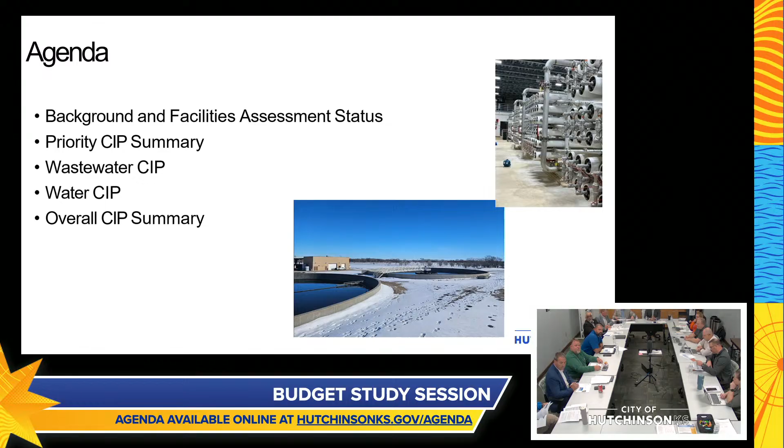Okay, that actually sums up what I was going to do. I'm Dave Gwynn, Director of Utilities for the City of Hutch. Evan Patterson is going to go over everything for us, and we have Alex Beck back here with HDR. Agenda for tonight: we'll go over the background, facility assessment status, and priority CIP summary. Then we'll go over wastewater CIP, water CIP, and the overall CIP summary. So I'll turn that over to Evan.

Okay, Evan Patterson, city engineer. HDR has been working to assess our water and wastewater systems. They primarily focused on site investigations of the wastewater plant and the water treatment plant, and they will be coming back for the wastewater treatment plant to investigate the digesters. Their investigations, coupled with our staff's participation in discussions, allowed us to prioritize the projects identified from those site investigations. We have a rating system that we developed, and the projects classified as poor or emergency are the ones we'll propose to include in what we call the Year 1 CIP, which is the 2026 budget.

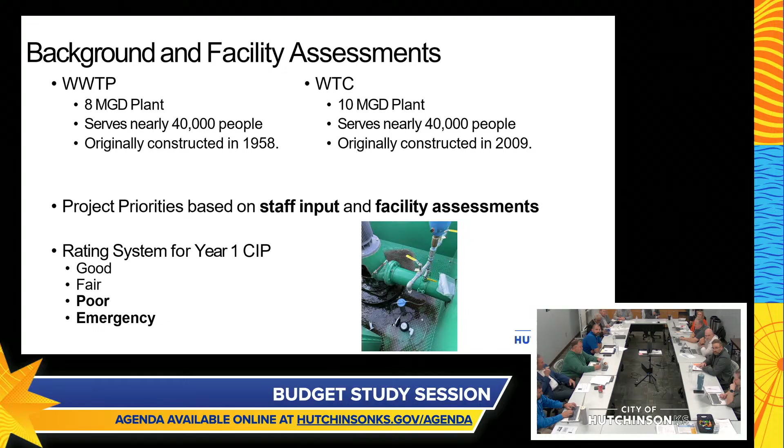Working with HDR and our staff, we evaluated the projects considering whether we would rehabilitate or replace parts of the plants. Our keys were to maximize the life of the assets in each area and to consider the smartest investment for the city in each case. We developed costs using vendor quotes when applicable, and bid tabs when we had that reference information. All the costs in this presentation are all-in costs—they include engineering, construction, procurement, and contingency. In some cases with multi-year projects, not all these costs would be burdened in the first year. We'll get into that with some of the more long lead time equipment.

Evan, if I could chime in real quick—part of the direction from staff and ultimately the consultant, especially looking at the wastewater facility during the budget tour, we saw the condition it was in. Even with that in mind, the direction was: is there still a way to salvage the facility instead of defaulting to building new? That was the guiding focus, in hopes that maybe there can be some innovation there. I wanted to remind the public at large, or whoever may be listening, that the default was to ask if there's a way to salvage what we have, not to just build new right away.

Correct. And in all these cases, what we're evaluating right now is just the ones classified as poor or emergency, primarily focused on health and life safety issues or risks to operation. These are the immediate fixes we need to do, minus a few we've actually started implementing already. We have an area of the plant where the walkways are unsafe—they were identified during the investigation. We've already roped those off and are working on getting them repaired right now.

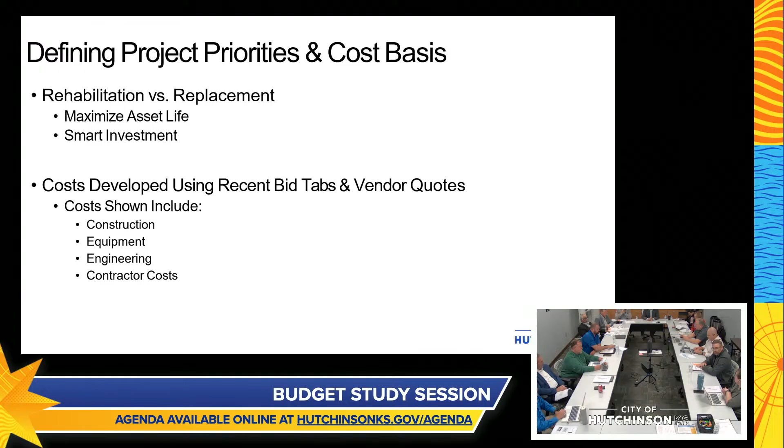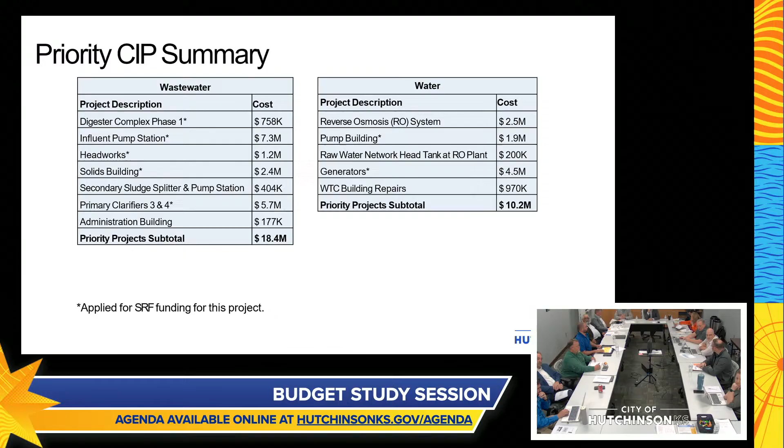So this is two lists of what we're calling the priority projects. We have a handful of other CIP projects that we'll go into detail on in this presentation. These are the ones we're going to touch on rather quickly because we don't have a ton of time. There's a list for wastewater and a list for water. We applied, or pre-applied, for SRF funding for a number of these, and we hope to have an answer on which projects will qualify midsummer. The date they promise is July 1st, though I don't know how we'll meet it.

So we'll first go through the wastewater treatment plant. You all did a tour of the plant maybe a couple months ago, so you're relatively familiar with the condition. Some of these photos show other items HDR identified during their visit. We have concrete that's failing, equipment at the end of its useful life, and areas that are not up to code anymore.

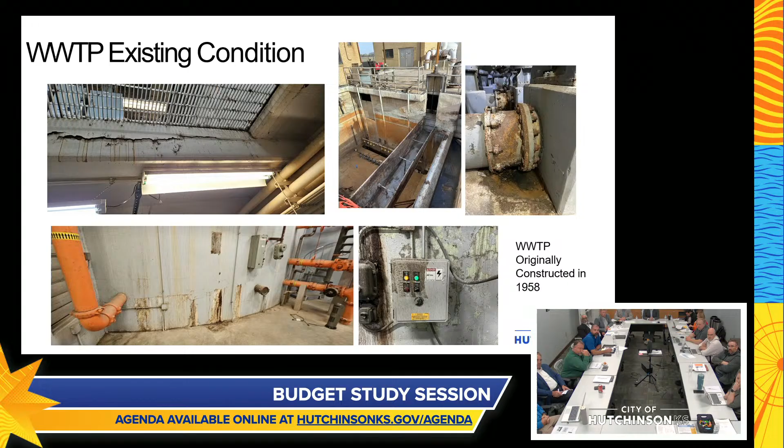One of the key areas is the digester complex. We're labeling this digester complex phase 1 because it's the set of critical items that make this area safe for our workers to operate in. We have life and health risks right now at the plant, and we feel it's important to spend this money as soon as next year to make it safe for our workers.

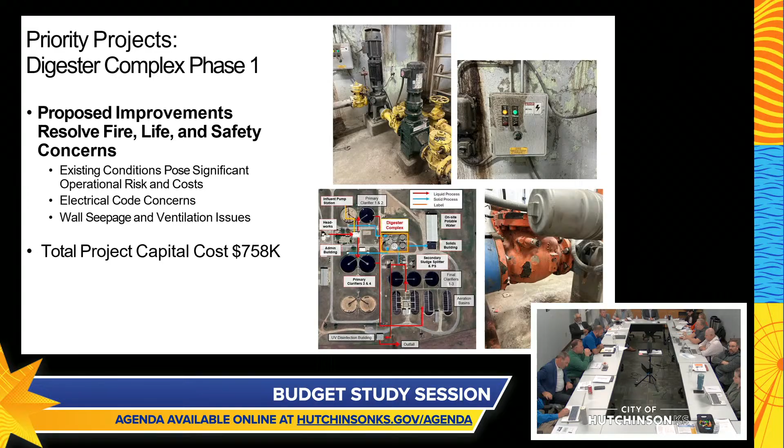As I mentioned earlier, HDR is going to be back soon to do an investigation inside the digester complex. It was identified by Burns and McDonnell as one of the critical areas even in their 2018 assessment, which is why we have some money in, I think, the '28 CIP to do work out there. It's probable HDR will identify some items inside as well, but this is the list. This $800K is for the life and health safety issues.

One of the other critical items is the influent pump station. This is the heart of the plant — where all the liquid feed comes in and sends flows throughout the rest of the plant. This system has slowly been decaying over the years. We had a number of pumps initially, and as those have gone out of operation, we've scavenged them or shut them down. We need to replace the pumps and redo all the piping and valving in the pit.

This project actually has two sets of pumps. The ones critical to operation are on the south side, and those are the ones we've identified as doing first. Phase 2 allows us to send flow to the clarifiers on the north side, letting us handle a lot of the varying flows from our bigger customers that cause problems with plant operation. That's an important capital expenditure, but not as important as the south side ones. So while we have a total of $7 million and change in the CIP, within this project the south side ones are really critical.

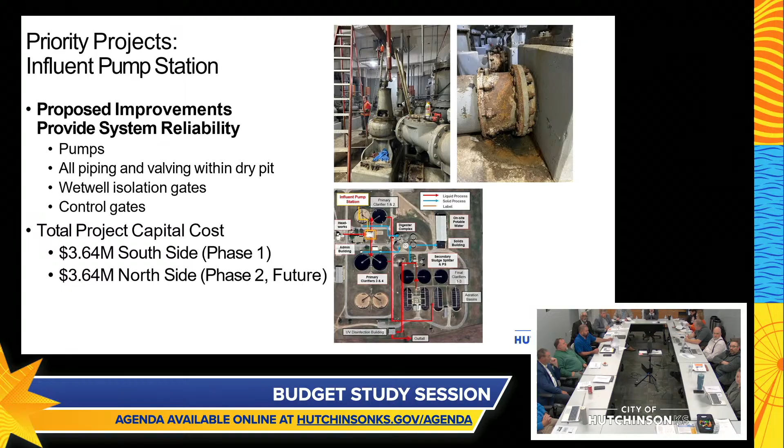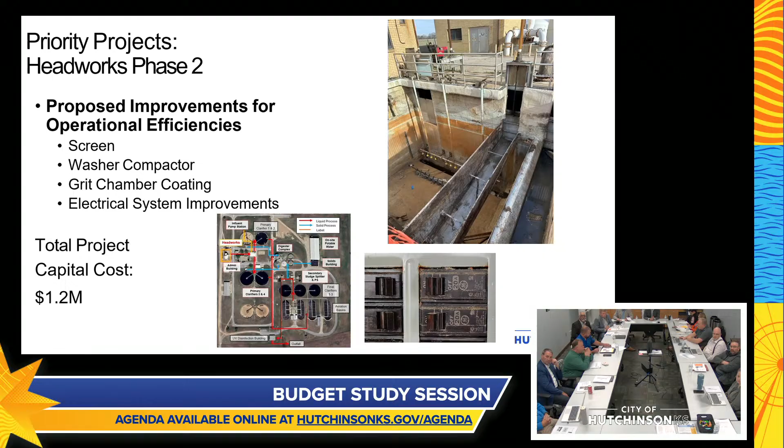This is Headworks Phase 2. We currently have Headworks Phase 1 under construction at the wastewater treatment plant, getting the grit screen up and running. This project will get the screen and other components, including electrical, up to code. This system isn't operating right now, and every day it's down impairs the operation of the rest of the plant — rags and other tissues get clogged in the piping and valves and can cause operational issues. Getting this up and running is key to maintaining operation in the rest of the plant.

So that's a huge portion of that $2.4 million, just for the replacement of a single piece of equipment. It's just that every day the Headworks isn't operating properly, it damages it more.

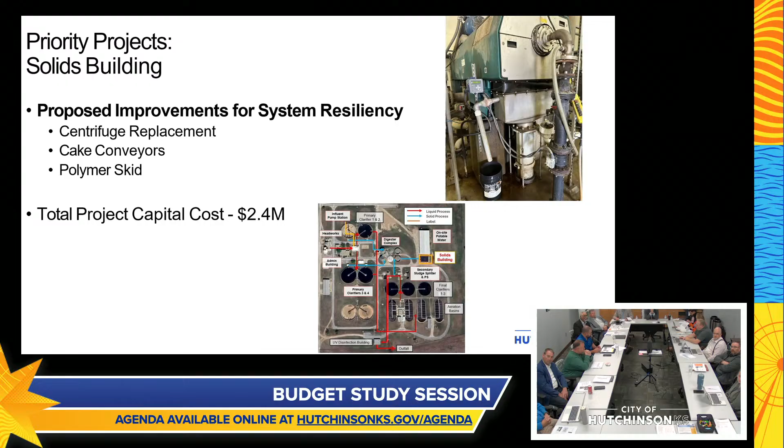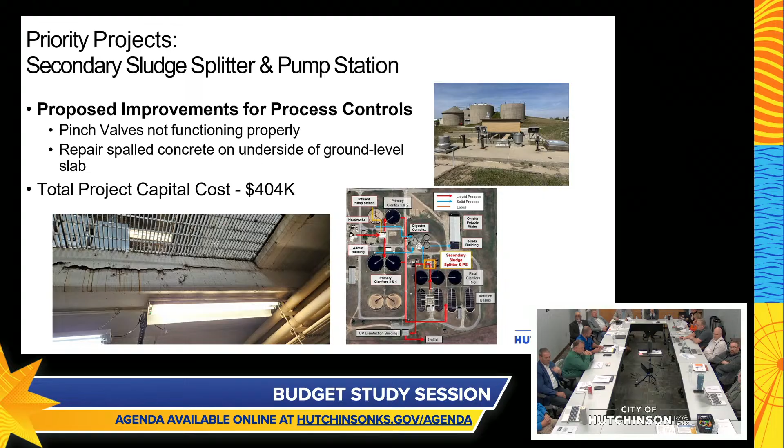The secondary sludge splitter and pump station is another key process portion. We have some pinch valves that control flow between the various parts of the plant, and they're not functioning properly, need to be replaced. You can see the concrete is beginning to fail on the slab for this splitter box and needs to be replaced. It's not as expensive, but it's a key part of this overall upgrade.

The primary clarifiers, we initially thought were in pretty good shape until we drained them for HDR's inspection. HDR then found, as you can see particularly in that bottom photo, where the concrete's starting to spall away, and you can see the rebar exposed there. Basically, all of the innards of the clarifiers need to be replaced - the rakes, the mechanisms, the platforms. The concrete's in okay shape, so the outside tank is okay, but we need to replace everything inside.

This $5.7 million looks like a lot of money. It is a whole lot cheaper than putting in two new clarifiers. So we're able to save a lot on reusing the concrete, but the clarifiers themselves are not in good shape. Unfortunately, while it's a big cost, it's also another element critical in the separation between the liquid and solids in the plant.

I have a question on that. What part, or how much of the concrete is being reused or being completely rebuilt? Probably, I would say the bulk of the concrete.

What we see right here is really where we're supporting walkways, where it's been supported above the liquid. The concrete for the tank itself, you can get a lot of extra years out of it by using an epoxy liner. So we'll maybe use an epoxy liner in the launders and in the bed itself. Sometimes that's where you get a lot of wear as the solids slide down the bottom of that cone. But epoxy has been used consistently in plants like this to get you another 10 or 15 years fairly easily.

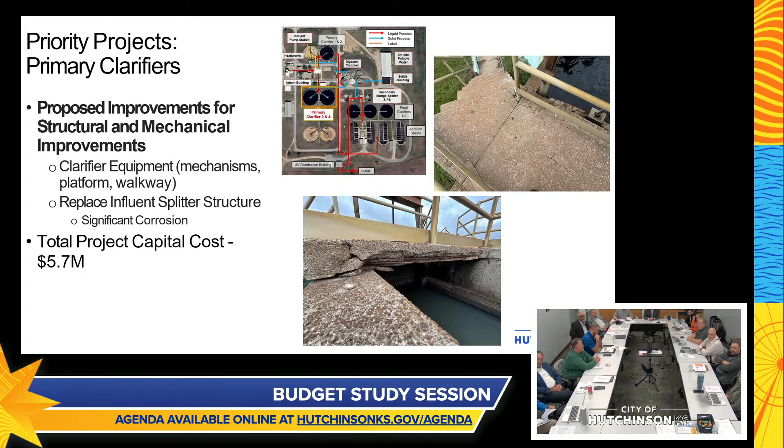The administration building - it's at the end of these projects, so you may think it's a low priority, but really it's just here because this is phase one. Again, like a lot of these other ones, we need to get the admin building to a point where it's usable for the occupants. We have issues with the roof, and then there are areas of the building where the workers don't go because of issues with mold.

We talked about getting potable water out to the site, and while that's a priority, we kind of had to step back and rethink how we were going to get it out there, so we'll talk about that at some point - just not ready to present any plans on it. So we'll have to get by as we can right now. But in order for the workers to actually be able to use the administration building, we need to address these two issues.

The administration building also has the controls in it, where it monitors the plant, am I right? Is that still there? I think that's still all in the lab, and the control room are all in the admin building. Does that need to be redone, or is that all fine? No, I mean, it's something that with the existing plant at this point, you don't need to touch. If you were to go and make a larger upgrade at the facility, then you'd need to revisit that item. So the controls will still work the plant when you get it all fixed, right?

With these improvements, there may be some electrical improvements required down the line, but at this point you wouldn't need to enhance that equipment at the admin building.

So employees, do you have enough adequate employees to maintain the system? Yeah, we're fully staffed right now, and we're working in part with HDR to get additional training for our staff on preventive maintenance. We're also implementing an asset management system to help maintain some of those systems better, so we're trying to do the right things to prevent this from happening again. That's our goal. June 18th and 19th we'll have staff in town to train operators and newer staff out of the plant later this month.

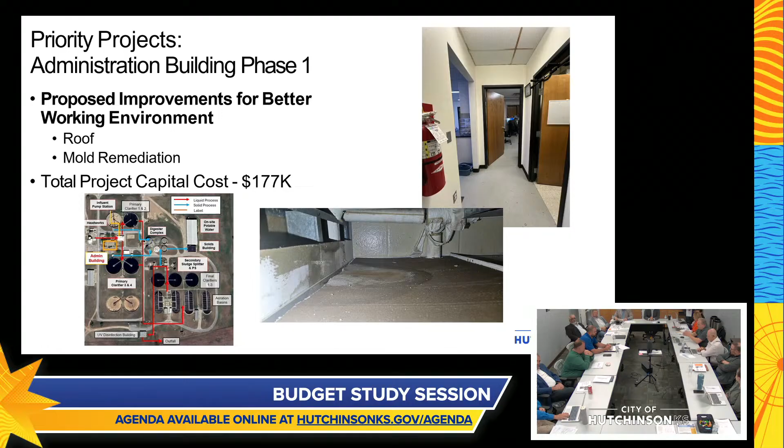So that's it for high priority projects at the wastewater treatment plant. The water treatment center is a much newer plant, dating from the late 2000s, around 2008-2009, when it got up and running. It's in much better condition, in part because it's younger and also because we've worked hard to maintain it. That being said, some of the things we're going to talk about now are also to avoid ending up in the same situation we're in at the wastewater treatment plant.

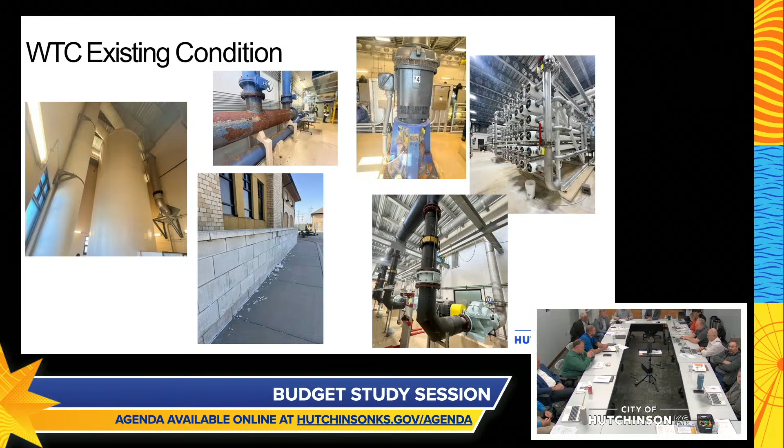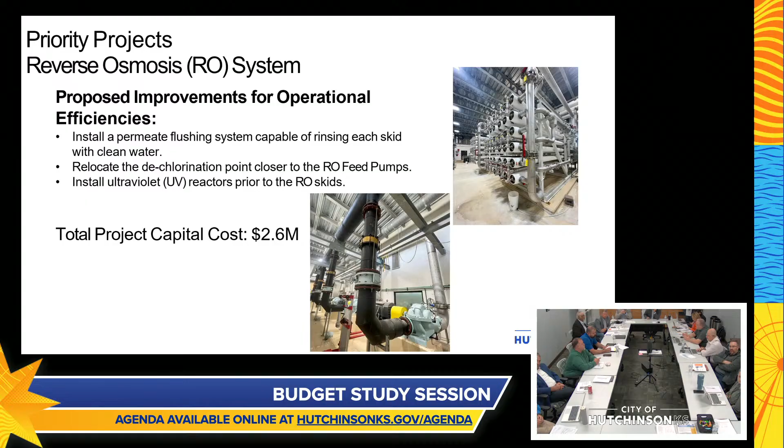We want to do investments that keep the infrastructure in good shape. We have some operational issues with our RO system - we're getting biofilm development, so we've got a couple of things we want to do to remove it. We're going to improve the permeate flushing system so it's easier for operators to flush the RO membranes, relocate the dechlorination closer to the RO feed pumps, and install UV reactors to help kill the bio part of the biofilm before it gets into the RO membranes. That should extend the life of our RO membranes and make the plant operate better. This is a fairly high cost, but hopefully has big benefits for us.

This one is also fairly expensive. I think all of you, when we did the tour and went down into the pump building basement, saw the condition of the pipe down there. So we have a lot of work to do - either surface prepping and recoating existing pipe, or completely replacing some of the stuff that's just corroded too much. One important thing to note is that we've recently replaced the HVAC equipment in the pump building to hopefully avoid this kind of corrosion. We were running chilled water coils in there and had real issues with humidity control - the humidity was insane, with condensation developing all over the surfaces. Now we have DX units in there to help keep the humidity low, and once we've done this resurfacing and pipe replacement, we shouldn't have this kind of problem again.

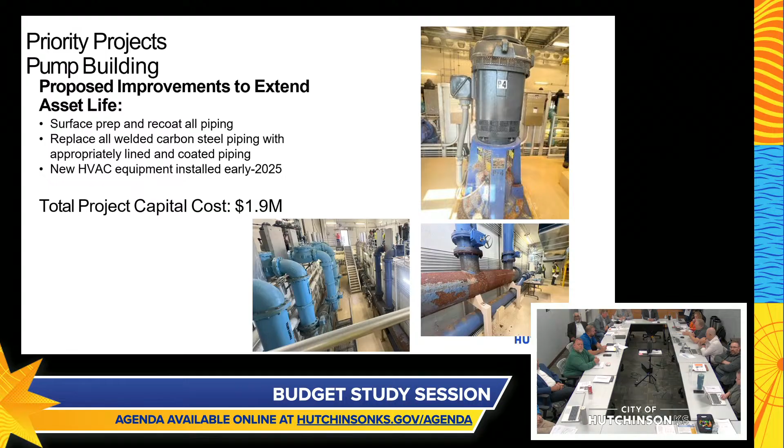One of the other issues we have is that right now we have VFDs on all the Northwest well field pumps, and they're all fighting with each other. They're having difficulty finding good operating points because of the way that they tie into the RO plant itself. So we've proposed putting in a head tank at the RO plant that gives them a consistent pressure they're all reporting to, which means the VFDs can then find that right point to run at. This is going to extend the life of the pumps and the VFDs because they're not hunting and bouncing around so much, and give us better operational efficiency.

I don't have a picture on this one, I'm sorry, but we've sketched some stuff up. It's just a head tank, like 20 to 30,000 gallons, something like that. Enough to handle the fluctuations in flow as we bounce around between the control points.

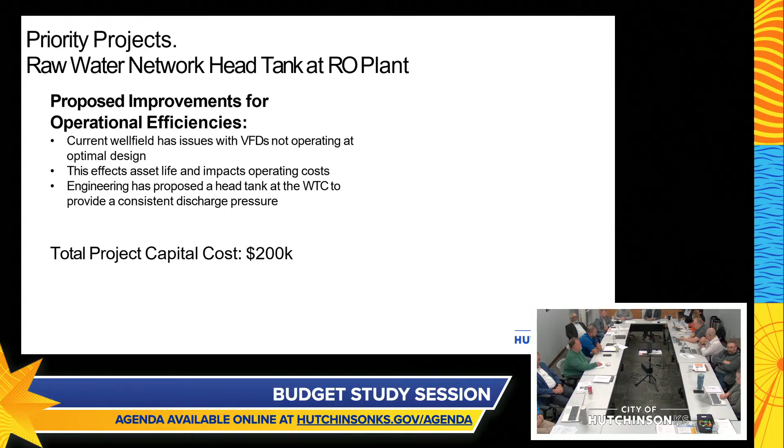So 8 hours before other measures are taken? Yes, correct. Yep. This is an electrician's question.

Now, why don't we do like wastewater treatment, we'll have 2 different feeds coming in. One feed goes out, we go to the other feed. We do have 2 feeds. They're both 2,500 kVA, but they both feed different parts of the plant. So we'd have to upsize the feeds coming into 5,000 kVA, and then we could do that. But I don't know how far back we're losing power without talking to Evergy about it. I'm not sure if it's something where it's the failure on their end at some common point back. Gotcha. So it doesn't, your 2 feeds doesn't feed the whole plant? I mean, no. I didn't know that. Yeah, I didn't either. Because I figured it was redundant, but I forget what they feed, but one of them feeds like the RO building, and then the other one I think feeds the pump building, something like that. So, sorry, went on a tangent.

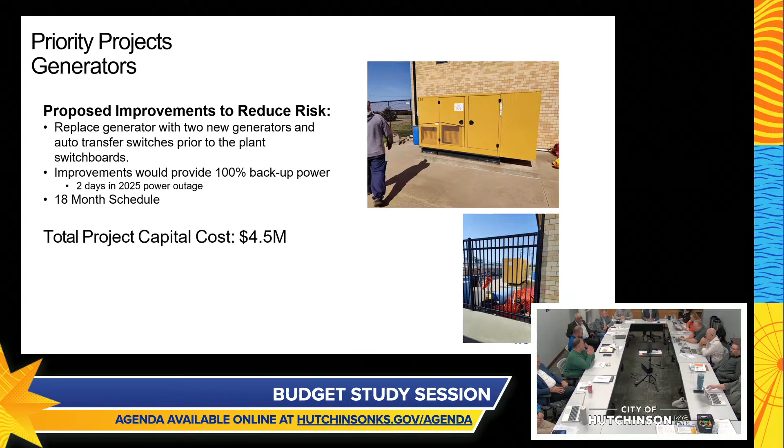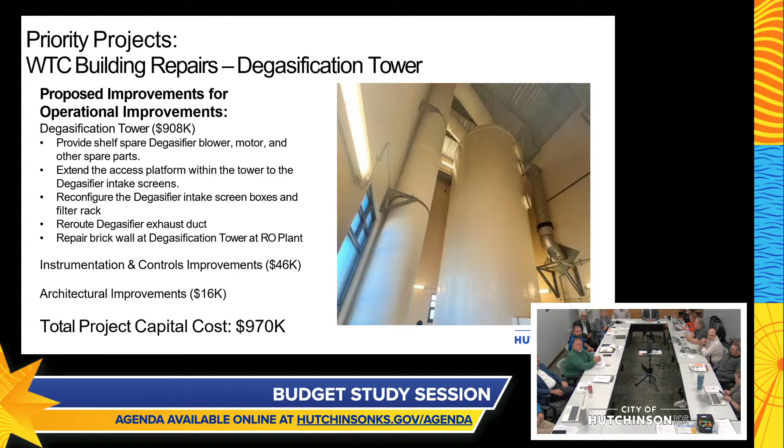Now, we pre-applied for SRF loans for those projects, but just because we pre-applied doesn't mean we're beholden to actually following through on those loan applications. I think it's worth discussing within yourselves as a city council where we think the appropriate use of our funds is. Some of those projects may be meritorious, but it's a lot of money that then wouldn't be able to be used for some of these that HDR and the City of Hutchinson teams have identified jointly as real priorities for our existing infrastructure.

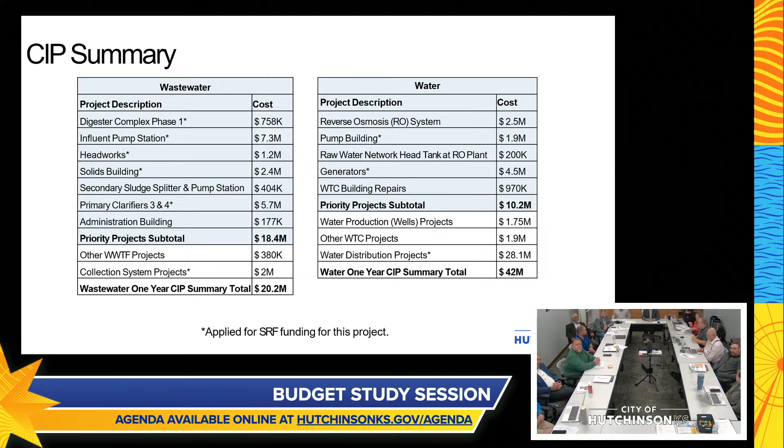And that's it. Questions? I went through a lot really fast. You guys have some other supporting documents in the back there that talk through some of this stuff in a little more detail.

We don't go through some of this stuff because we know we're kind of busy tonight and we don't want to get bogged down with everything, but it's in there so you have that information. If you have any questions for us, please don't hesitate. You want to come back to the plants, take a look at stuff - Alex is always willing to have a conversation, so whatever you guys need, we're more than willing to help.

The only concern that I have is do you plan on putting a full-time electrician, because there's a lot of electrical in this. It's mostly 85% electrical. Am I right? Dave and I have talked about that.

Okay, yeah, because I used to work on all that stuff - I know it's a lot. It is a lot, yeah, it's crazy. I mean, mechanicals like to think it's all driven by the process equipment, but the electrical and instrumentation is really what keeps everything moving. It's still a work in progress. Yeah, but that's not including your wells up there.

Right, wells, all of the lift stations, all of that infrastructure.

So I feel like you guys should have started with a statement that says the water is all good and you can drink it and you can flush your toilet. It's just that we have really old equipment and it's working double and triple overtime and we have to do all these extra steps, and that's why we are where we are. Because if you just hear what you guys just said and that's it, that's concerning, but we are not at a point where the water is at risk or any of these things. So you guys had me scared for just a minute, but I know the backstory. I just want that out there for people watching or just tuning in - there is no concern, it's just that we have really old equipment, it's working way too hard, it's not efficient, nor is it within its maintainable life any longer.

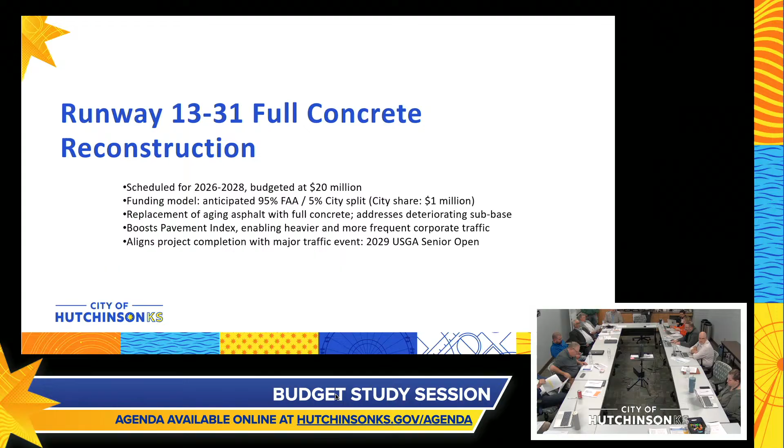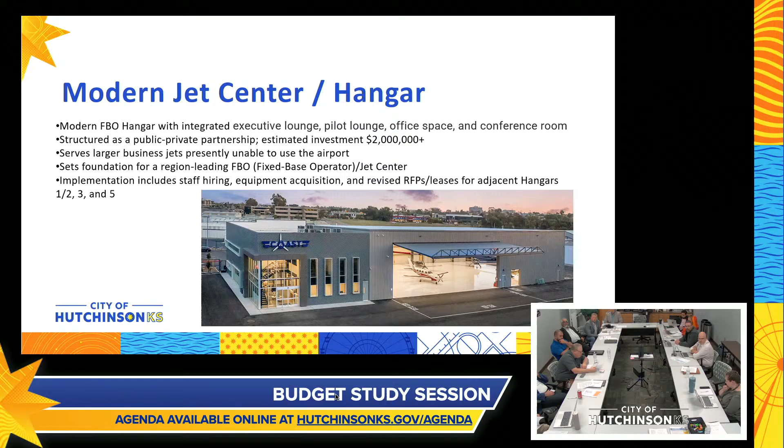Next part of this is FBO operations and exercising the city's proprietary exclusive right as the sponsor of the airport. This would effectively be the airport administration taking over the fueling operations.

At the conclusion of the Wells Aircraft Services lease at the end of 2027, we would have to beef up our staffing model. This is an estimate of what that would look like: 4 operations technicians, an ops manager, admin assistant, and airport director. This is the closest labor cost I could get at this time, as well as the ground service equipment layout, and in your packets it breaks down all those numbers for you.

In this scenario, this transition enables Wells Aircraft to remain at the airport if they so choose, and continue to provide their Cirrus Service Center services.

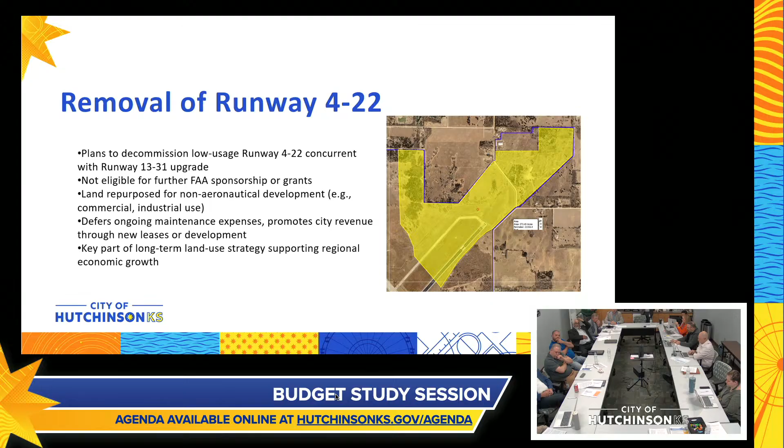So for the 2026 CIP, originally I had airport signage replacement at $25,000. We might push that off to a later date.

On the Airport North maintenance shed - this is to bring electrical power to a shed that was built prior to me joining the city. The shed is already set up, it's already got electrical doors, it's already got lighting, it just doesn't have power to it. If we give power to that, we could actually satisfy one of the requirements for getting a dedicated plow truck grant.

Next up, I've got the rehab for 13-31, the reconstruction. We would be looking at the planning and engineering analysis next year. That totals at $160,000. We would utilize BIL, and then our local match would be only $8,000.

Alec, what's the grant on this, on the Airport North utilities? You said this would make us eligible for a grant. Yeah, so that would be for a dedicated plow truck. Well, what's the amount of the grant? I'm not there yet, to be honest. So we have to get power to the building first - they require us to house that piece of equipment.

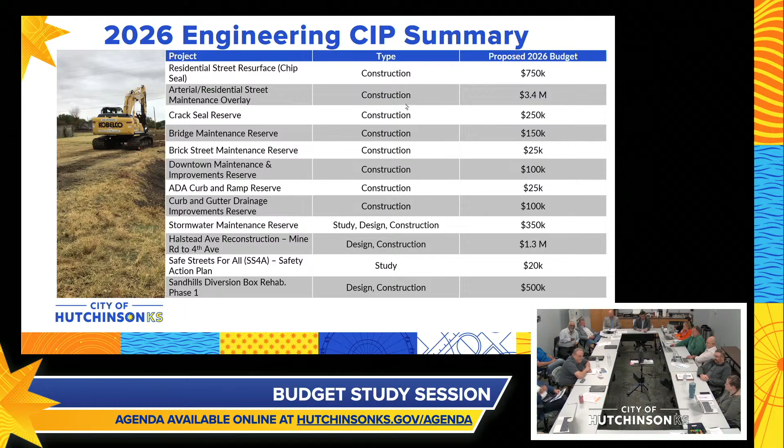So that's kind of the overview of these, and we have some slides that go over each. Our residential chip seal areas are planned to help keep the streets drivable. Chip seal is a very good product for keeping the streets up to date, but eventually more work has to be done. So we have an 8-year cycle right now where we touch every residential street in the city once every 8 years.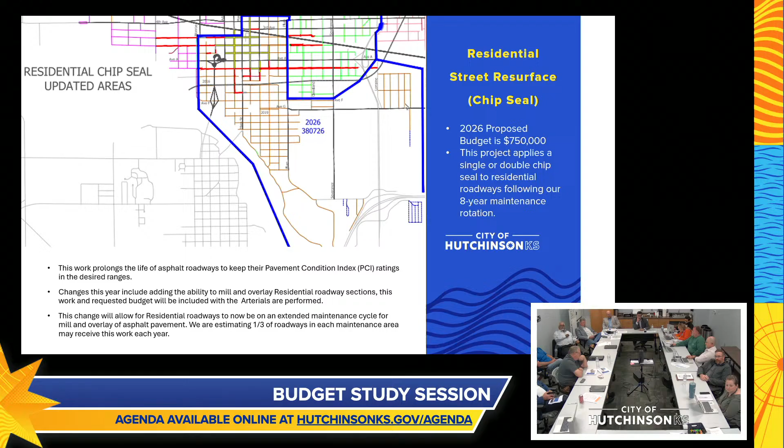Along with that 8-year cycle, starting in '26 we're also going to implement a mill and overlay on a third of each of those areas. The idea is you can only chip seal so many times before your streets get too thick - you have to do something different. So we'll do a mill and overlay on a third of those 8 sections of town, meaning once every 24 years, every residential street in town will have a mill and overlay, which is roughly the expected lifespan of asphalt roads.

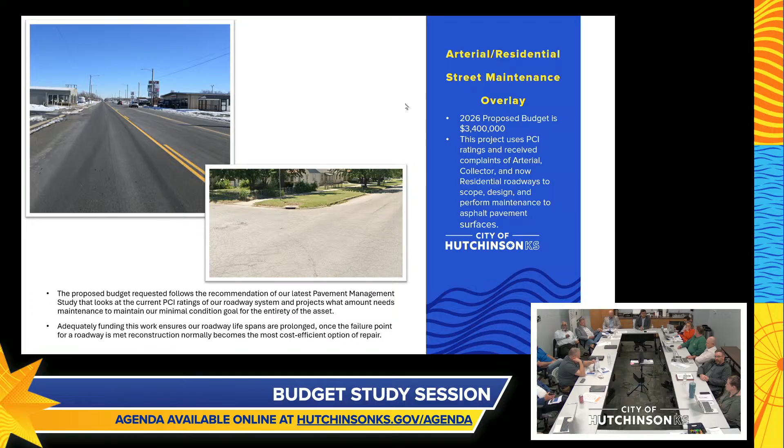We're doing chip seal as site maintenance. Crack sealing is just an ongoing process to keep the roads up to date - it expands the life of those roads by keeping moisture out of the areas.

I think so, yeah. So I have a question on the crack seal and then a question on the sand hills box. Stupid question about the sand hills box - when they fix the concrete, are they just doing it from the inside?

Depends on where the failures are. I think the failures are largely on the inside - from the last report we had done about 10 years ago, I believe the failures were all on the inside, but I'd have to go back and look.

And then on the crack seal, once they crack seal, we're not going behind them and repainting center stripes and sidelines in every location. What we're trying to do with newer projects is work with new street construction to have that center line offset slightly, so when you're putting your thermal lines down, they don't line up directly on the seam. Because when you crack seal that seam, you end up covering it up.

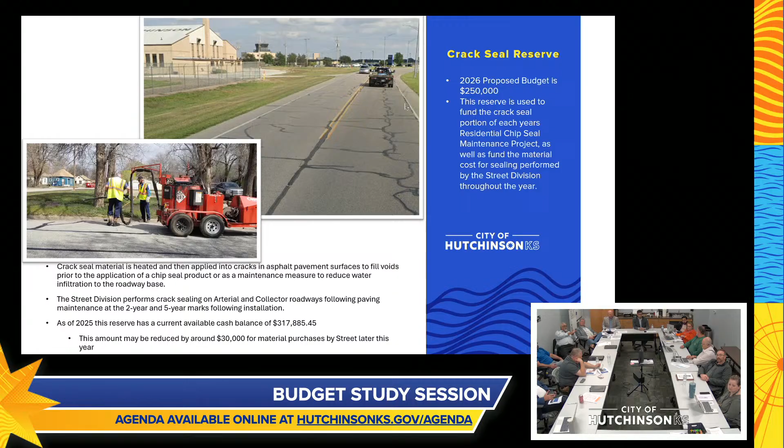We talked about brick streets earlier. For brick street maintenance, we're building a fund up so when we find areas needing work, we have a few options: stained concrete, where we can put it in and it looks like brick street to keep that appeal but with a more durable surface, or asphalting the roads completely and taking the brick street away for a better, more maintainable drivable surface.

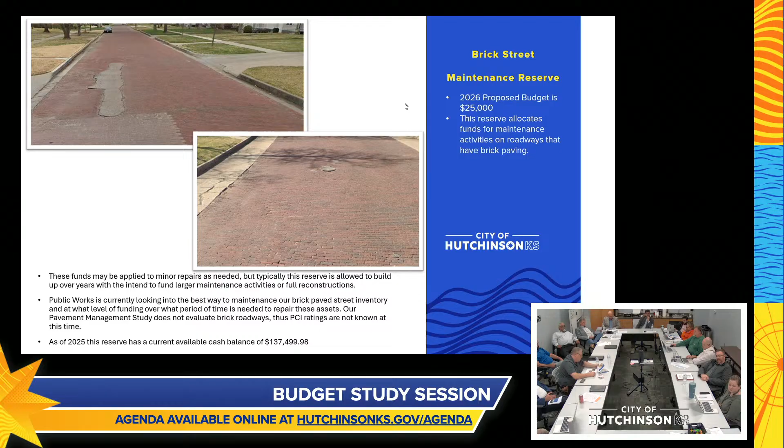The downtown improvements - we've had a lot of downtown ADA ramps and other designs done, including brick inlays, that aren't a good fit for our particular climate. They work great in California where you don't have freeze-thaw cycles, but the brick inlays here get moisture underneath and start popping. So a lot of the downtown area is going to get fixes, bringing those sidewalks and stuff back up to where they need to be.

That'll be good to go through when we select the designer for the downtown TA grant - considering which areas have those dissimilar materials and bad alignment of the bricks or edges. How far does that $1 million go, and what area are we covering with it? We've talked with Dave Sotelo about coordinating some of that with the downtown groups.

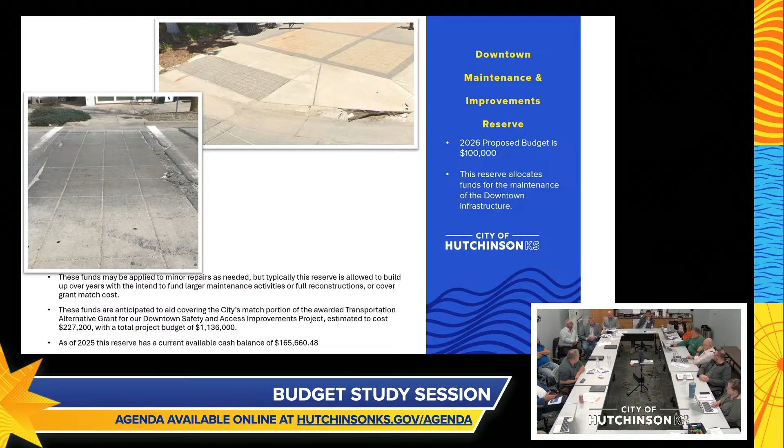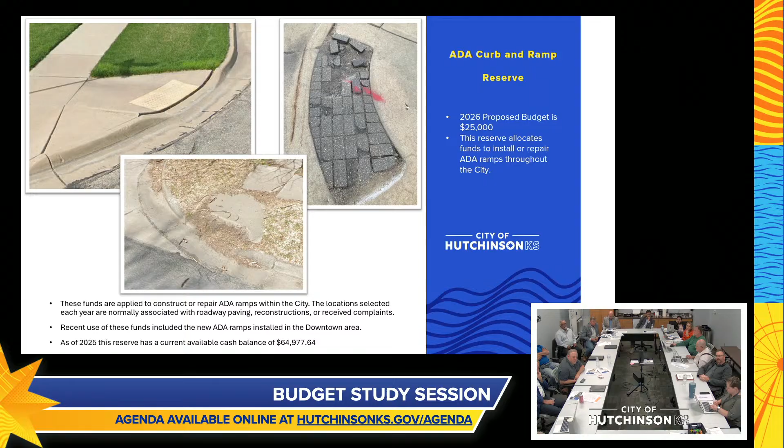And then with the ADA work, it follows the same principle. We'll be looking at intersections that at one point had ADA call for brick inlays as a detection surface. We're moving to better design patterns now, stuff that stays in place a lot better for protection.

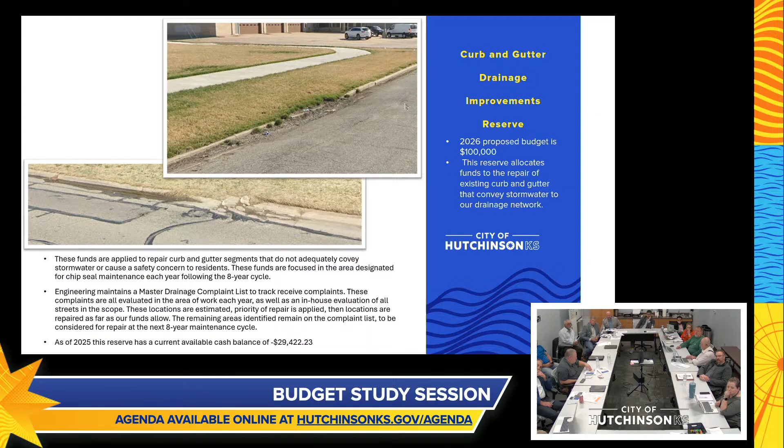Our curb and gutter program is the same - we're following through with the 8-year cycle on residentials. When we find locations with drainage issues or curb and gutter damage, we go through and fix those as well, tying it in with that 8-year cycle. We may not hit everything in an area that year, but we try to get the worst of the worst, especially in areas with drainage issues.

And then with our stormwater maintenance, we're moving towards doing a lot of our projects in-house, so the street department will be out cleaning ditches, getting that stuff up to where it needs to be.

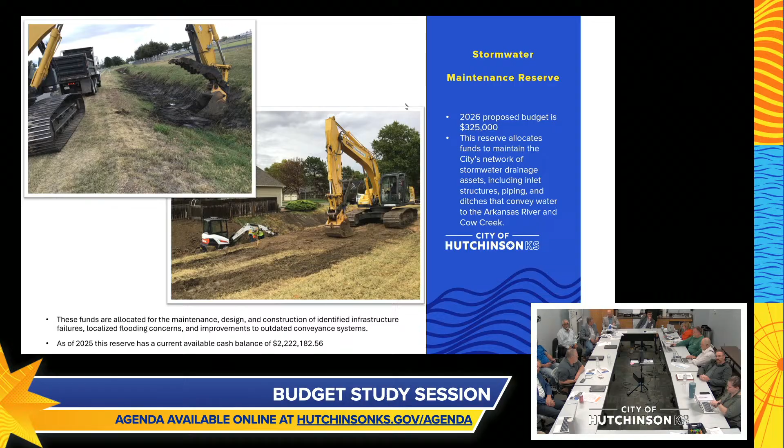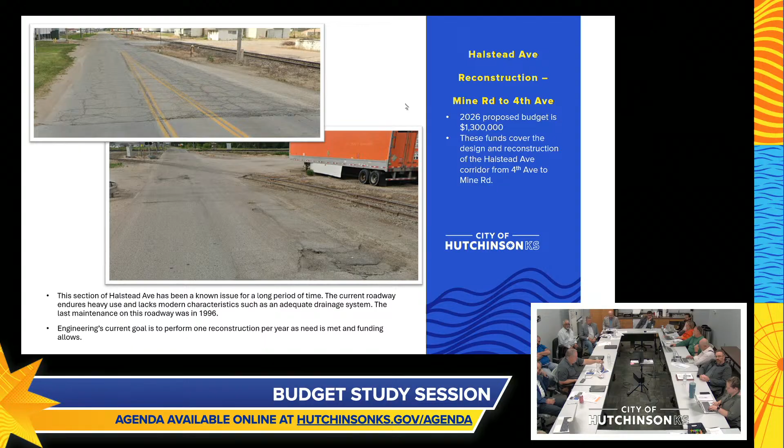I'm going to let Evan talk about the safe streets program because he knows way more about it than I do. Sure, this one is a program that lets us spend somebody else's money evaluating areas in town to determine if they're appropriate to investigate further. As Cecil mentioned earlier, we've been evaluating some of the signals in town for whether or not they still warrant having signals, but we could also look at whether we're having lots of crashes at any particular intersection. Hopefully we'll have some data to come out of that.

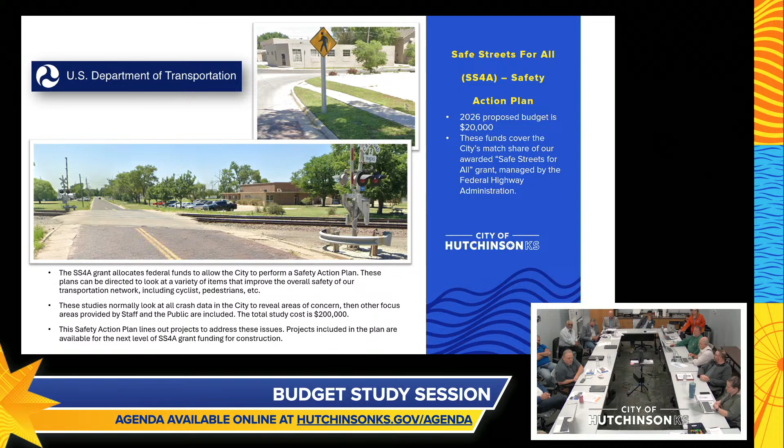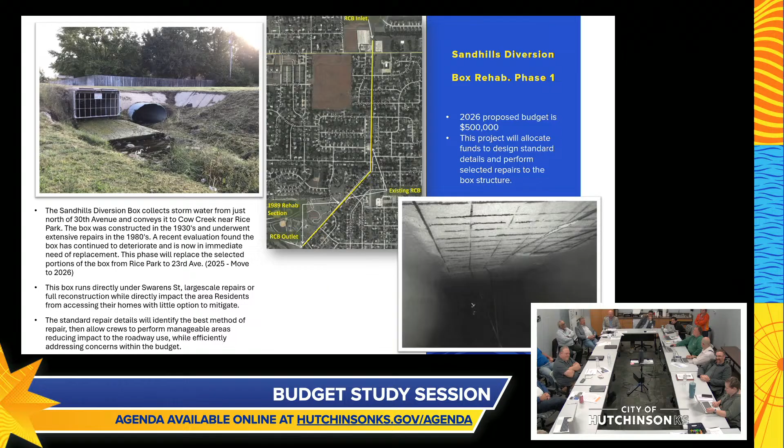This slide touches on the Sandhills diversion box rehab. So that's the entrance. If anybody ever wants to, we'll be happy to get some people to walk through it with you. In the bottom right, you can see some of the rebar just starting to pop through, whether it was too close to the concrete to begin with, or whether it fell off over time. Not sure, but that photo dates from 2015, and it's probably not any better now. If you do go through it, you have to sign a liability waiver, and go ahead and make an appointment with your chiropractor after, because it's a lot of leaning over.

We're going to jump in, I guess stop there for a second to see if you have any questions on that portion before I jump into the traffic lights.

On the 2026 proposed budget, there's $100,000 for curb and gutter drainage, but the available cash balance is negative 29,000. So are we just paying that back of the 100K first? Some of that is going back into the reserve, I believe, yes.

Well, I'll jump into traffic lights. Like we've talked about many times, and I believe Steve can definitely back me up on this, our traffic lights are aging. We have some systems out there where the poles and stuff are 50 years old. The average lifespan expectancy of a controller is about 10 years. I mean, it's just a computer out in the weather. We have some controllers that are pushing 30 years. So it's definitely a very aging structure that needs to be brought up to date.

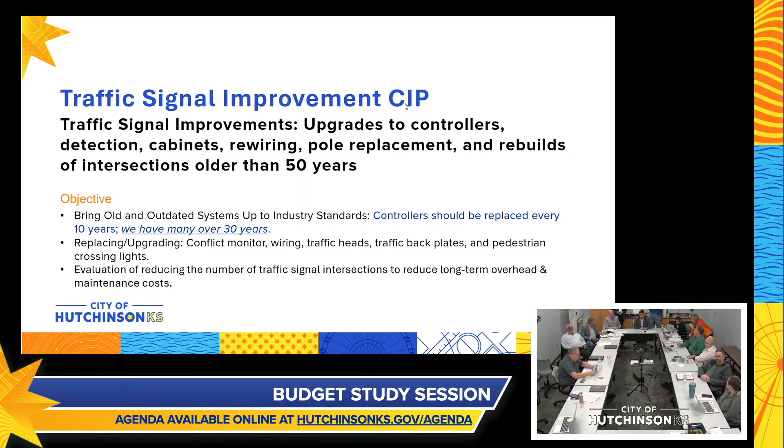Along with that, the wiring itself, out in the elements, starts to get old, cracked, brittle. And when that happens, it allows water to get in, and every time it rains like it has the last couple of days, our traffic techs are very busy, either putting lights on recall or going out to check why they're kicking themselves into flash. So we're trying to have a fairly aggressive approach. In years past, we haven't been able to spend as much money on traffic lights as what really needs to happen. So the big share of what we're looking at is the wiring, and the environments aren't perfect - all of the manhole covers aren't exactly waterproof. Moisture gets up into those manhole covers where the wiring sits, and as that wiring gets older, occasionally rodents and other stuff get in there and chew on it, or even the connections themselves just tend to get loose over the years. So moisture gets in there, and that's what needs to be fixed.

Is that your work, Steve? No, that's just a real fast comment - when those manholes get full of water, and they do if this persists, they'll fill to the top. You can take the manhole cover up, and the water is boiling. That's electricity! Oh my gosh, it's boiling. I had an apprentice once, and I opened that up and said, 'Give me that wire down there,' and he looked at me like, 'You got to be crazy!' Well, yeah, the wire is boiling in there. Oh my gosh, yes - a lot of voltage all day long.

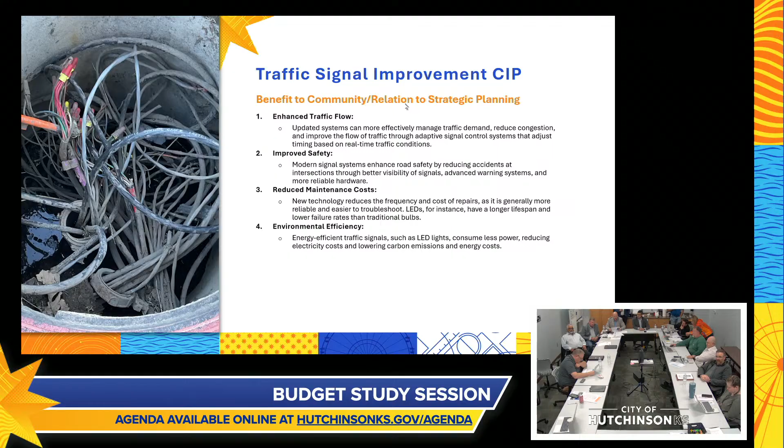So we're really taking an approach to how we can try to improve these systems that are aging. And then, so there's some more of the cabinets. For anybody who's never had to be inside one of these systems, my hat is truly off to Steve and the people he's trained, our traffic techs we have now, because if you just open that up and don't know what you're looking for, it really is a mess. And it's designed that way.

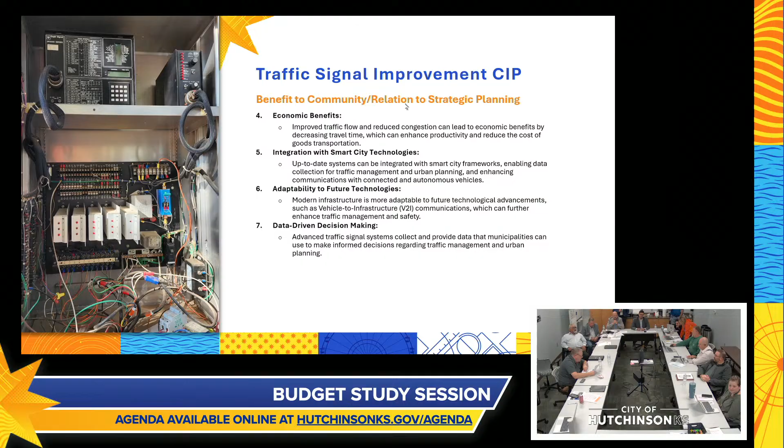That's your one. So how many of that's the DP 2000? How many do you have left? More than we should. I'd have to look, around 15 or 20 I believe. And then we still have some of the M10s out. 10s, huh? So, very old systems that should be replaced.

Just kind of a brief overlook of some of the ideas we had going in. These were some of the numbers we were looking at, just stuff we're gonna try to get replaced, you know. So we were looking at, and this was done in like a 6-year idea. We've kind of redone some of those numbers.

These are some numbers that we had gotten from information JEO gave us on what we need to bring this up to date. And they had figured we had $10 million worth of needs just to bring the system up to date. So in order to try to do that in a 6-year period, it was asking for obviously way more than we'd be able to get. $1.5 million a year, many years, it just wasn't working. So this was just something that JEO gave us. I put it in, or had the staff put it in for me, just so we would be able to show you everything that's kind of out there.

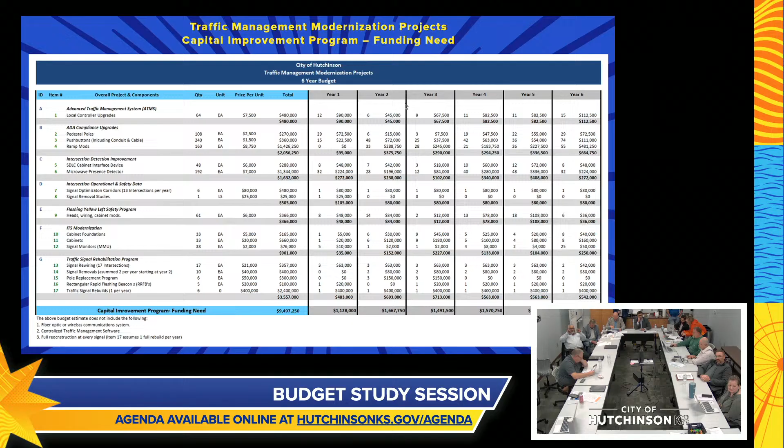That's the gist of the initial ask for the upgrades and maintenance. We also had another CIP separate that we were asking for, because traffic poles, like we talked about, are expensive.

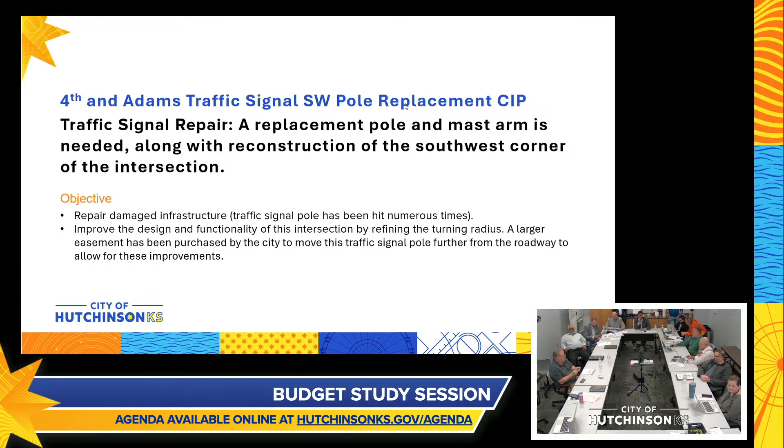This is a traffic pole that sits at 4th and Adams. I don't know if you can see it real clearly in that picture, but the side of the pole has been hit numerous times by semis turning too sharp. The pole needs to be replaced, and with that, we've already had to go purchase some easement from the gentleman there, and that pole will actually get moved farther back to be safer. But that one pole alone is $100,000 to replace.

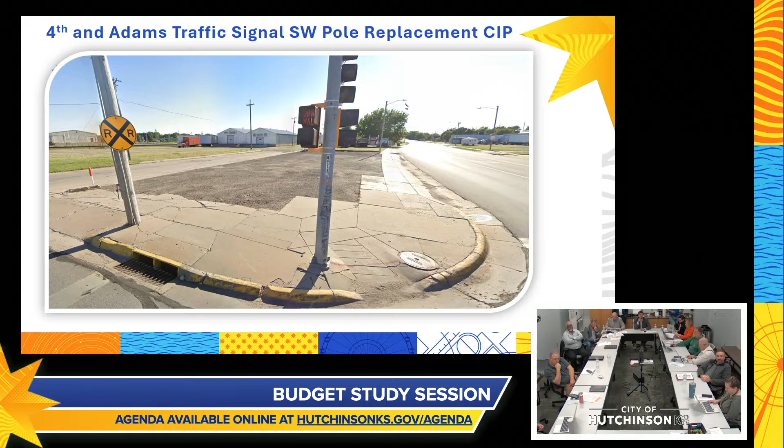So we put it as a separate item, and that's probably the way we're going to do it in the future, is we'll have these poles in these areas like this as a separate line, so you can really see what that one cost is. And that's pretty much the traffic in a nutshell, so any questions?

Poles cost $100,000, and usually a 6-month wait. I see an economic opportunity in the city of Hutchinson for some business to start a manufacturing operation, there's only like 3 places in the country making poles. That's correct. And what do we have to, the new foundations have to be 23 feet deep, yes.

20 feet and 3-foot diameter. Yeah, so it's to meet the new KDOT standards. Gigantic foundation, 23 feet deep. Yes. Yeah, and it's a whole cage structure that you put in there. It used to be 10 foot deep.

And that's for standard. If it's something out, typically like a multiple lane out on K61, it may be more than that. Added problem on those traffic poles is on the risk management side, all these people that keep hitting them, their insurance coverage is not even close to the cost. So they might have $25,000 on property coverage, and we end up having to turn it to our own carrier to try and get most of the cost recovered for the city.

So if you do away with some of those signals on the intersections, good, because just to put up a stop sign costs next to nothing. You don't have to put the stop sign 23 feet deep? No.

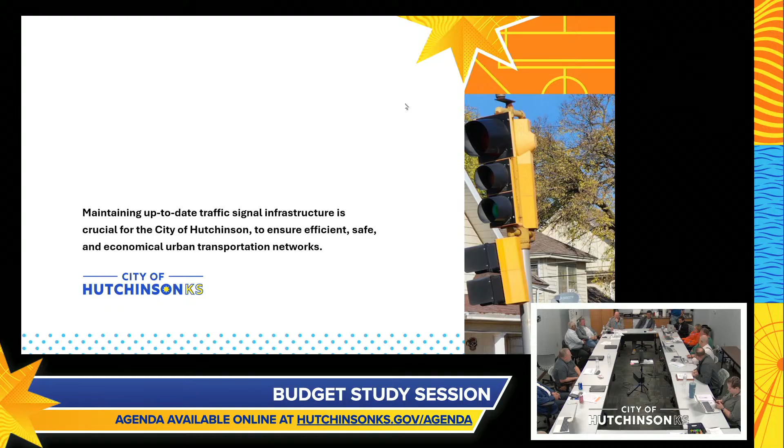Fine, put the traffic one together. Yes.

All right, Justin. This one? Maybe at midnight or something. That's the right one?

All right, so my projects, CIP projects for 2026.

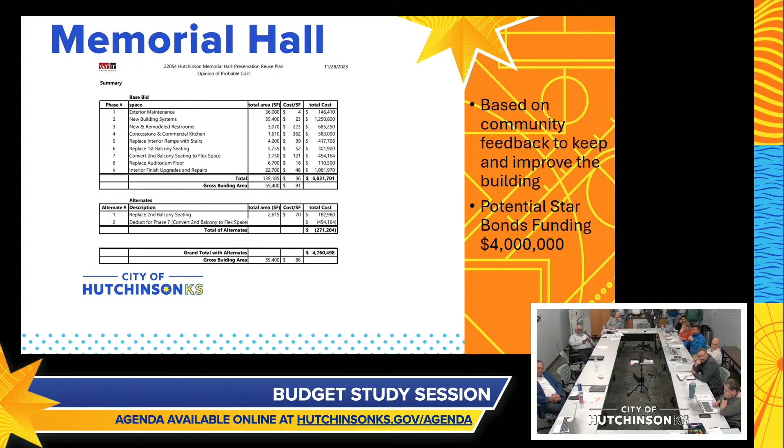The large projects are heating and cooling, about $1 million or $1.2 million for new building systems, and interior finishes and upgrades is the other big one at a little over $1 million. This also assumes the top balcony - the third level, or second balcony, the very top level - gets converted into some sort of multi-purpose, flexible space. If we don't do that and keep it as is, there's actually a cost savings - that's what the number below, $4.7 million, reflects if we don't enclose the top rooms, that top balcony.

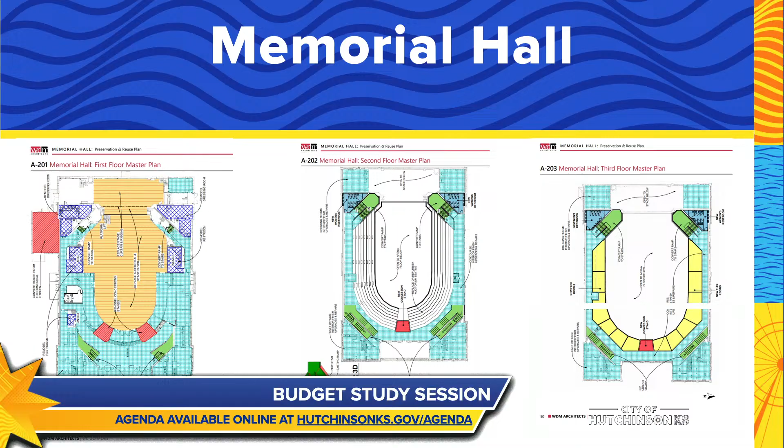So how are we ADA compliant when we do away with the ramps for wheelchairs? The ramps are not ADA compliant as I know, so we put steps in there instead. The elevator was put in the 90s, early 2000s, I think.

Okay, so I'm going to pause there. Any more questions on this project before we move on?

I emailed the fire marshal and chief about the elevator and everything. They said the elevator is in good working order, and in case of a fire or emergency, it becomes the rescue point. So everything about the elevator is on the up and up. It's really the ramps that are the concern. There's no way to make those ramps ADA compliant - you need so much linear footage to make that work.

It just doesn't work. If I remember right, those elevators do have emergency equipment in them. Yeah, and we also have areas of rescue in those old offices, and they're all marked and unlocked. So if somebody's not able to get to the elevator, they can get to one of those areas of rescue, and there's an intercom system in there as well.

Okay, any more questions before we move on?

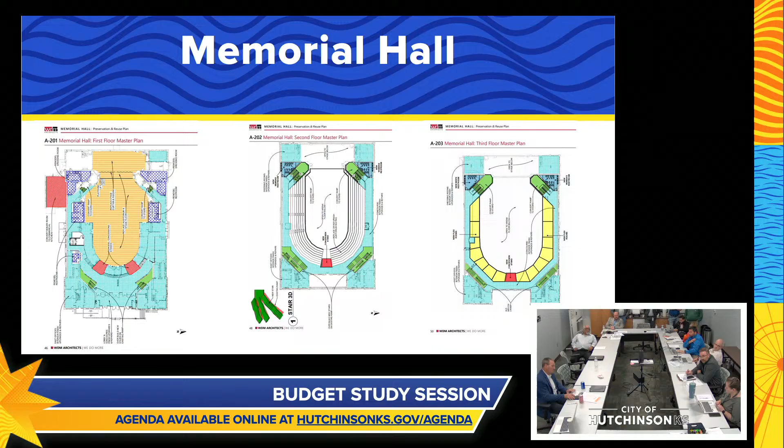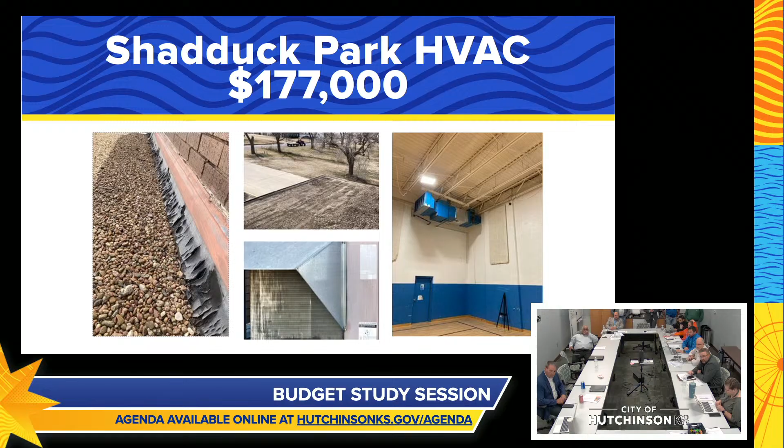Jim Martinez Trail improvements - this is a phased project, and I just have the first phase in here. The first phase is really just design of converting the entire trail from asphalt to concrete. A lot of the issues we have now is because there's 4 inches, or probably 3 inches, of asphalt on bare dirt - they just scraped the dirt, rolled it with a street roller, and put the asphalt down on top. So there's not much we can do to save and salvage the asphalt. The idea is to convert to concrete, which is a better surface, and it also allows us in-house to make repairs down the road if we need to.

This design would also look for opportunities to get the trail out of the levee system. We hear a lot of complaints from people that use the trail that they feel unsafe inside the levee system, because you can't see very far either way - you have the waterway on one side and the levee on the other. So we'd look for opportunities to bring it outside of the system.

Whether or not that's doable, we're not sure, because that's a Corps of Engineers levee, so we have to be careful when we start messing with that.

Also in this design process, we look for opportunities to add additional amenities—it could be a small shelter, a bike feature, whatever—just to create more of a linear park feel as opposed to just a straight trail. I do have in my CIP for the following years a phased approach to improve the trail. Total investment over about 4 years is looking at about $2 million, but the bulk of that is just converting from asphalt to concrete.

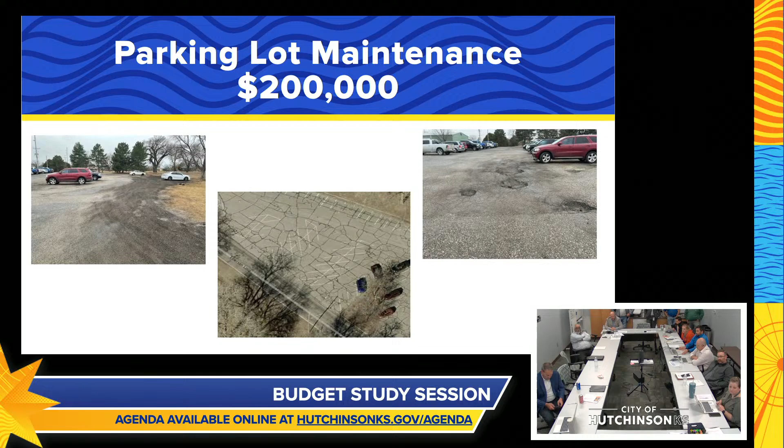The second piece, the middle picture, is the parking lot for the zoo. It'd be to just resurface that and restripe it. The goal mainly is the restriping because it's really tough to get in and out of there. It's not great for drop-offs for camps and those sorts of things. When we have busloads of kids in the spring, it's really kind of a pain. So we'd reorganize the parking lot to make it a little bit more convenient.

We've identified that we want to keep the train loop where it is, that it's not worth completely rebuilding and moving, but we do need to do a lot of really heavy maintenance, and essentially we do need to rebuild it. Right now the railroad ties just sit in the dirt, and then there's track on top of that. Well, those railroad ties have rotted, a lot of them are getting rotten and soft and start to shift, and then we have derailment on the train. So this would be elevating the railroad like you'd see on a normal railroad track, with 18 inches or so of crushed stone, so those railroad ties will last longer.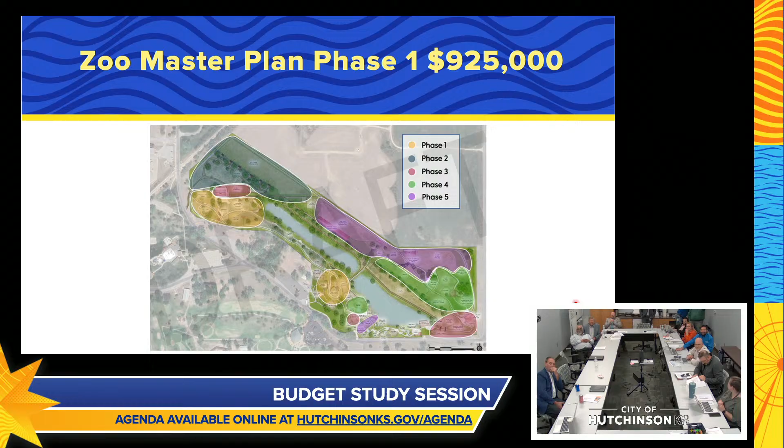And the last thing is just, or anything else on the zoo before I get into reserves?

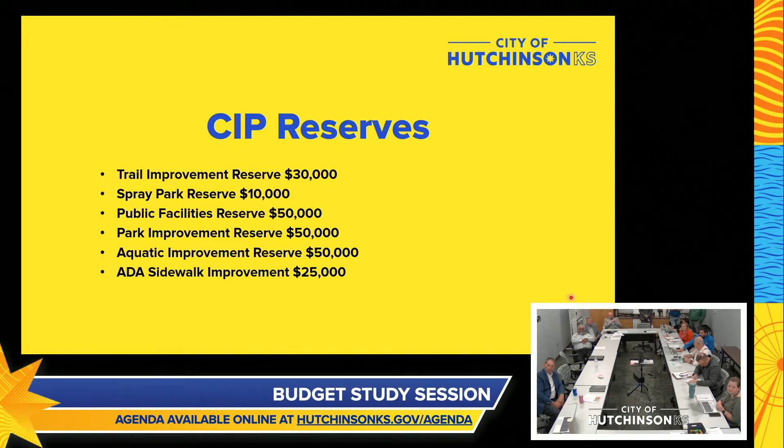Any other questions? I'm not sure who's next. Maybe I was last. No, for the Chiefs.

Chief Burley, really the only thing that they had was rehabbing a part of the, actually Burley, could you talk about the only piece you had? Yeah, it's just a rebuild of the generator for the court that controls the entire courthouse and law enforcement center. It's necessary, so if we have a power outage, we can still maintain communications and keep emergency services up. It was actually set to be, needed to be rebuilt in 2018 because it's met its end of life, but due to budgetary constraints at that time, it was pushed down the road. It's at that stress point now to where that rebuild needs to occur in 2026.

The total project cost is $200,000. Our share of that is 68%, which is $136,000 for that. That will be at the top end of the bill. We're still working with the county on if we should supply that full cost, or if it should be better divided amongst all the residents inside the courthouse and law enforcement center. But that's the only thing that we have.